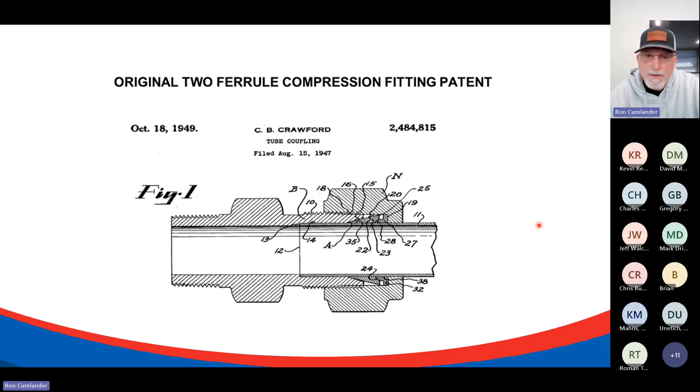And the reason I point that out is this was the first patent for the most recognized brand currently in the market of Swagelok. This lasted 17 years. And then before it expired, Swagelok tweaked especially the back ferrule flange angle to 15 degrees from a 90-degree perpendicular, and changed the angle of the nut inside to match that 15-degree angle. And they may have made some other tweaks, but those are the most obvious.

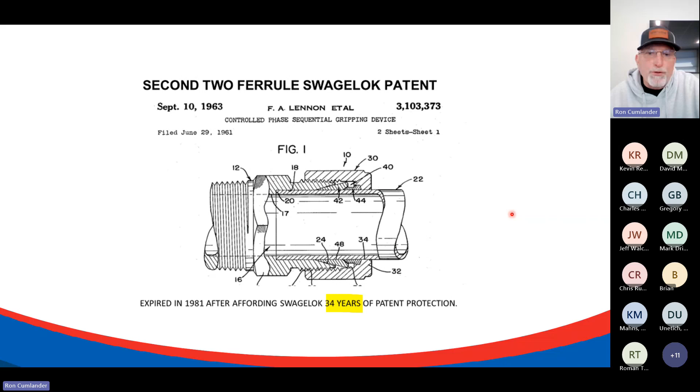And that tweak alone earned them a second patent that ran until 1981. So they had patent protection in the U.S. market for 34 years. And of course, certainly branded themselves over that period of time.

Now, the original back ferrule from them at that time incorporated a selectively hardened nose that was hardened through high temp carburization. And so that injected carbon into the nose of this stainless steel to give it the differential of hardness to grip the tube and hold it against blowout, and to deliver the required bite depth to seal against high pressure gas molecules. And so this was the cat's meow for hardening stainless steel at that particular time.

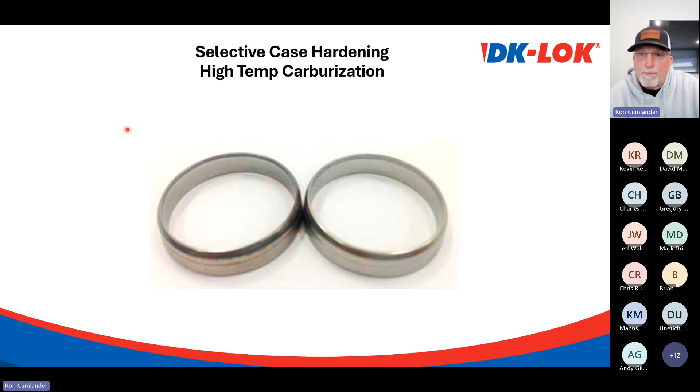Now, as we move forward through history, their 34 years of patent protection did expire in 1981, and many competitors got into the instrumentation fitting business to compete with them. And Parker at that time had brought in a two-ferrule design after the patent called A-LOK, and that is still available in the marketplace today.

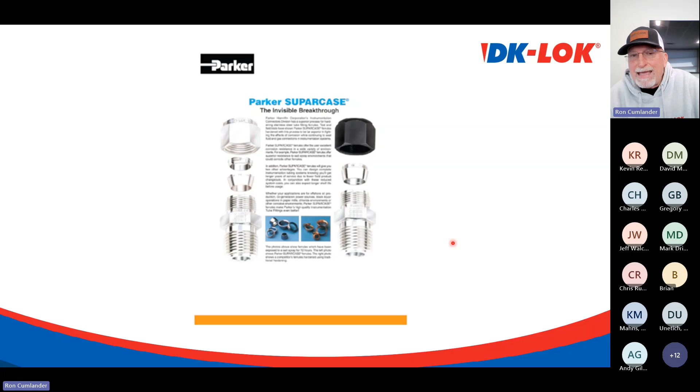But in the late 80s, Parker introduced a new hardening process for hardening the surface of stainless steel that was trademarked as Parker Suparcase. And that is still on their product today. They completely case hardened their back ferrule and their single ferrule offering. And that was technically called Kolsterizing, named after the professor Kolster out of the UK, whom Parker sponsored his work.

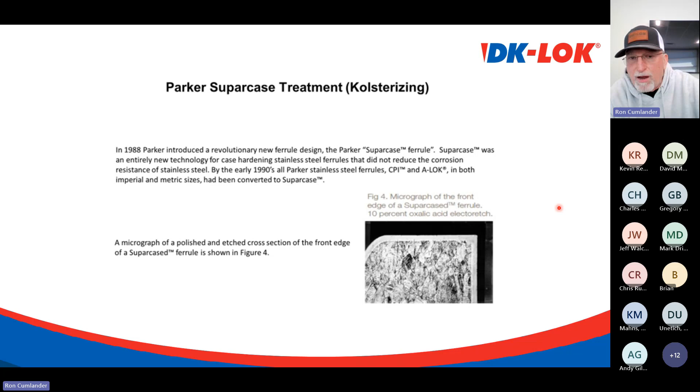So it allows you to harden the front ferrule to a controlled depth. You can choose how deep you want to harden this. But the key to the Kolsterizing process, it is a low temp carburizing process that controls that process so that no carbon forms. So it maintains the natural characteristics of corrosion resistance from the base metal.

So at that point, Swagelok realized they needed to address that. And virtually every other competitor in the market that had entered after 1981 used this same method early on after Parker introduced the new Kolsterizing method for hardening stainless steel.

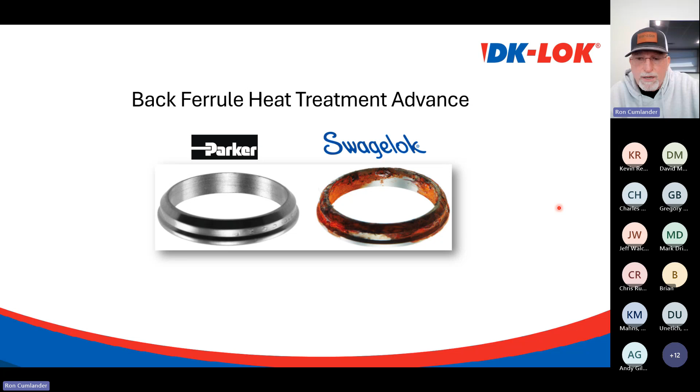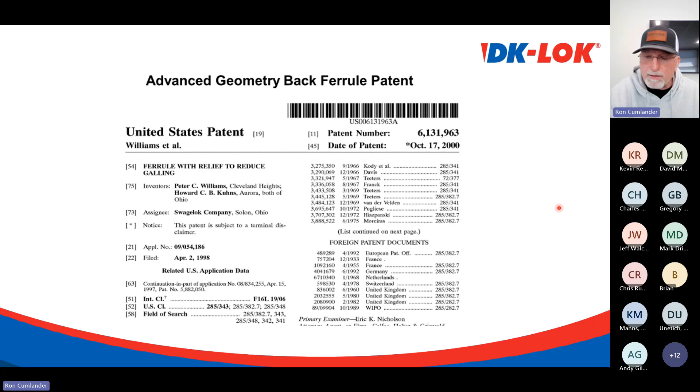So as Swagelok went down this road to address the corrosion, they were also approached by a major oil and gas firm and asked if they could make a compression fitting that would work on a new tube material developed by Sandvik called Super Duplex 2507. Very lightweight, high pressure capability, very slick, and very hard to grip. So those two things in combination resulted in the advanced geometry back ferrule patent from Swagelok that was awarded in 2000, and they introduced the product in New Orleans, Louisiana at the ISA show with this brochure right here.

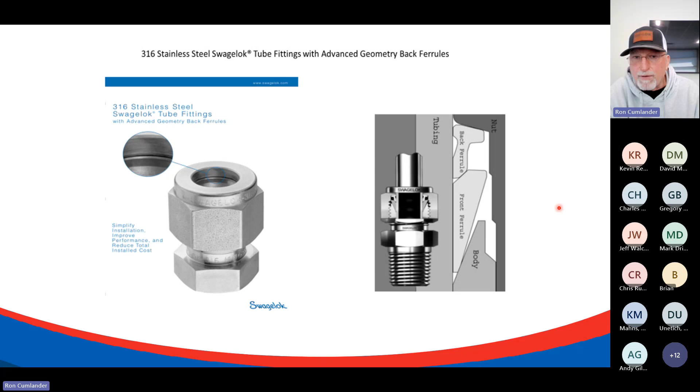And the back ferrule had a completely different shape, and they developed by this time a new hardening process to address the corrosion. So basically, what Swagelok did was they took their traditional back ferrule, which I refer to as a full mass back ferrule, and they went into the flange area on the inside and machined a groove to take some of the meat out of it. And then the outer shaft, they conically tapered it from the flange down to create a very thin cross section right here.

So basically, they took muscle and mass out of the ferrule with these two design changes before they applied their SAT-12 hardening process over the entire surface of the ferrule to give it back the strength it needed to have a differential of hardness for gripping, holding and sealing an annealed stainless steel tube, and at that time the Super Duplex tube that had been introduced by Sandvik.

Once Swagelok accomplished this, they then rolled this design over into stainless steel. When they made the first full mass ferrules in Super Duplex, the torque was so high they had to put cheater pipes on the wrenches to tighten a turn and a quarter. Changing to this design allowed them to reduce the installation torque to an acceptable level, and then they improved the hardening process. And so this has been in their product since August of 2000.

So you see a cutaway here of the current design, how it looks after 1 1/4 turn installation. And this is a cutaway or a rendering of the original full mass back ferrule after 1 1/4 turns. They look very different in shape and behavior because they are, but there is no difference in the roles and the responsibility that these two designs have for producing a leak-free connection.

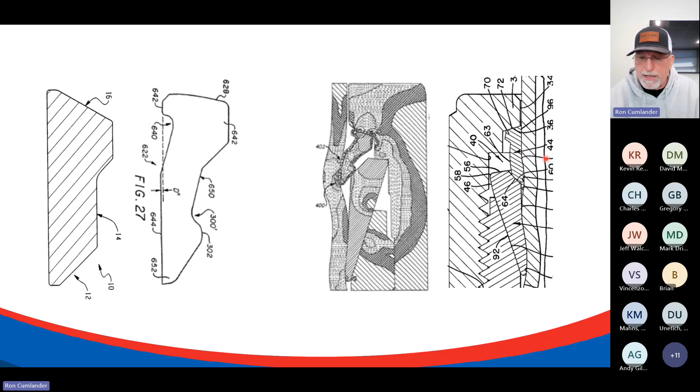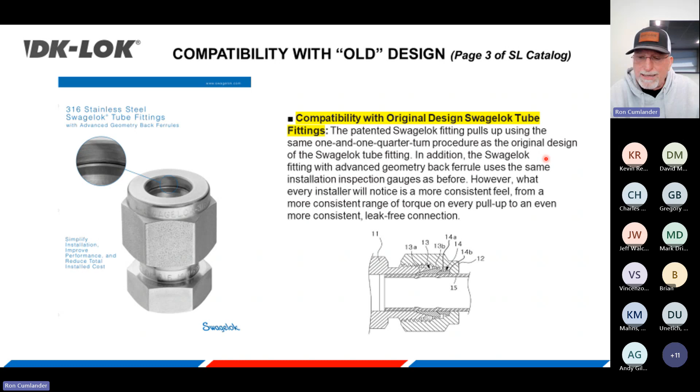So one bullet point that I would like to point out in this brochure that they introduced at that time, they stated that the new design was compatible with the original design Swagelok tube fitting. And that's important to the DK-LOK story, or the case that we're presenting to you today, because the DK-LOK fitting that we offer today is the original Swagelok design, but with a patented non-corrosive hardening

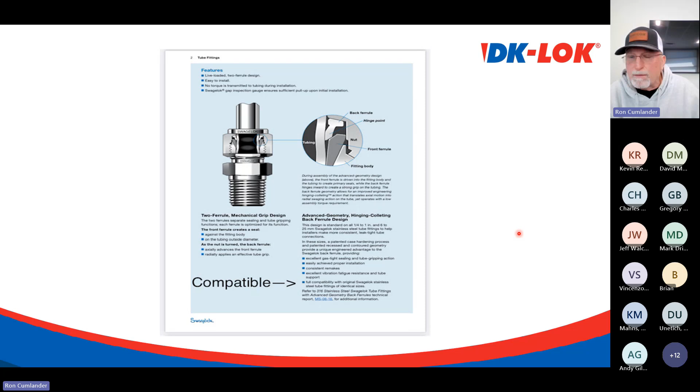process on the nose. Swagelok still makes the compatibility statement in their published literature today because they still have millions of original back ferrule connections around the world still performing. Not all fittings get replaced or taken out of service. In fact, many don't.

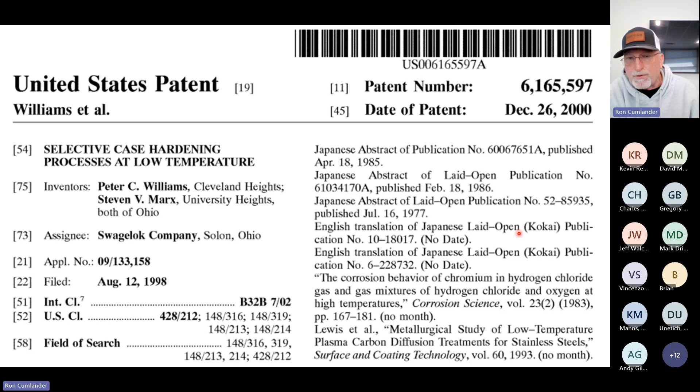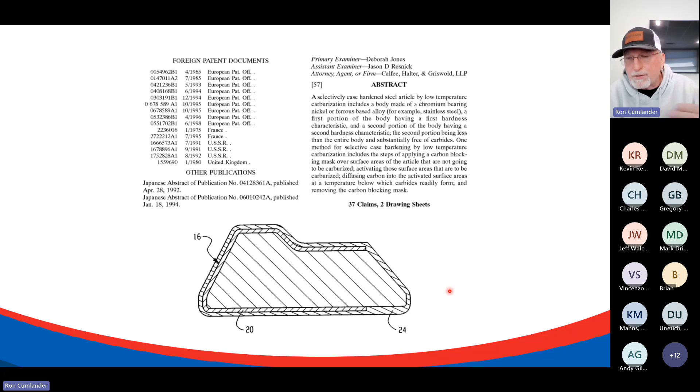So at the same time that they introduced the new geometry back ferrule, they also applied for and received this patent right here, which is a selective case hardening process at low temperature. Basically, this patent was taking their original design back ferrule and hardening the nose with their SAT-12 or similar process that would present no corrosion. To my knowledge, they never put this into their product. They used this to keep any competitor at arm's length and prevent them from putting this process into their product. And again, why this is important is because this is exactly the product that DK-LOK brings to the market today.

We have a full mass back ferrule, and this is very expensive to manufacture, but we believe it's the most robust and best technology for a compression fitting back ferrule in the market. So we mask the ferrule with copper plating, leaving only the nose unmasked so that when we apply the heat treatment, the nose gets hardened, and then we strip the copper plating off, leaving you a full mass back ferrule with only the nose hardened with a non-corrosive hardening process.

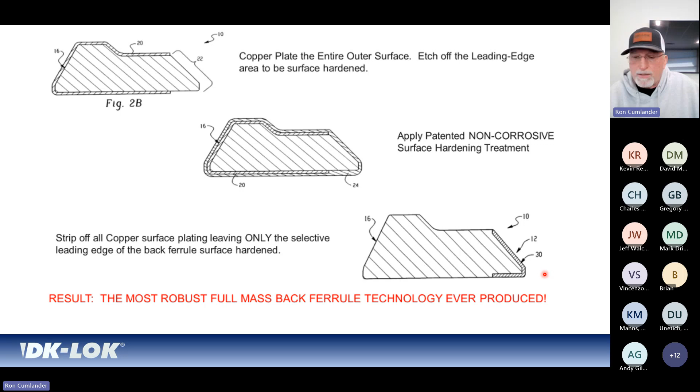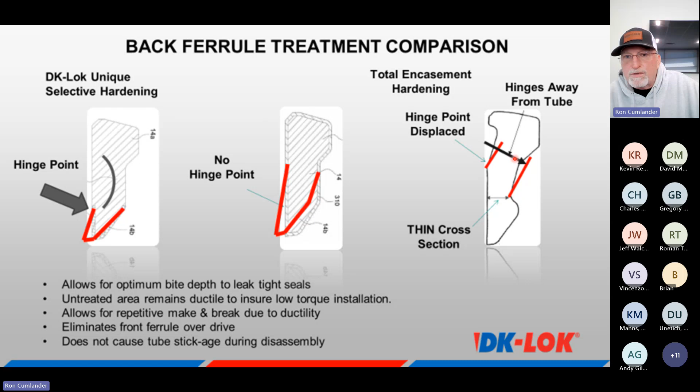This also represents the current DK-LOK offering, exact same design, but our hardening process maintains the natural corrosion characteristics of the base metal, and it does not corrode at all. In the center is your Parker A-LOK Suparcase design, which many other brands have followed, where they completely harden the entire outer surface of the full mass back ferrule. It eliminates the hinge point, which makes this ferrule much stiffer and harder. So your installation torque is going to be increased as a result of that. And then over here on the right, of course, is the current Swagelok back ferrule design.

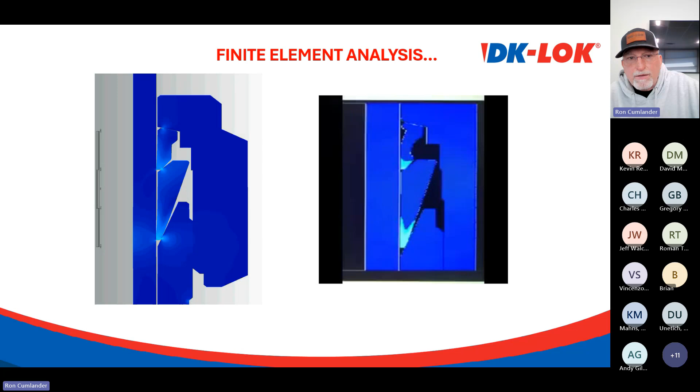So here I'll show you a finite element analysis of the two designs. Again, this would represent the original Swagelok and the current DK-LOK design. As you tighten, the nut drives the back ferrule forward into the front ferrule, which forces it down onto the OD of the tube and against the body bevel. When the front ferrule's forward movement stops due to the wedging action, the leading edge of the back ferrule dives inward to deliver the required bite depth to prevent blowout and to seal against high pressure gas molecules.

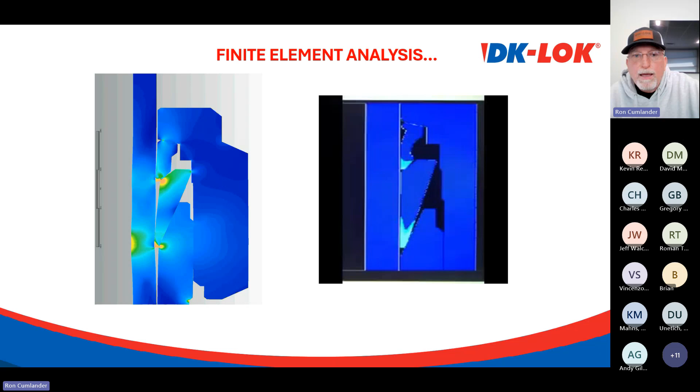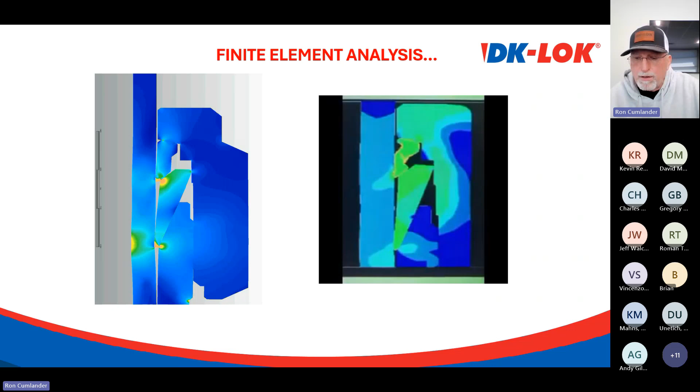Over to the right is the current Swagelok design. You'll see with their geometry back ferrule that the behavior is somewhat different, but same role. Drive the front ferrule to a sealing position, dive inward and provide bite depth into the tube OD, and lift the front ferrule into a live loaded position. So even though the shapes of these ferrules are different and their behavior is different through the 1 1/4 turns pull up, they both have the exact same responsibilities. Drive the front ferrule to seal 100% on the body bevel, dive inward to deliver the proper bite depth, and lift the front ferrule into a live loaded position.

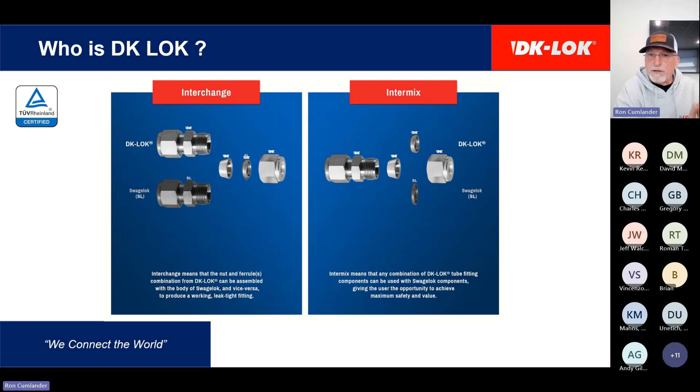So because our design is their original, the best way we knew to establish our performance and our quality and demonstrate it was to do an intermix test against a most well-recognized specification. And intermix would be dumping the components of the products into a brown paper bag, shaking it up, and whatever combination you pulled out, you put that together. Interchange is another term used where you've got an existing nut and ferrule set that's complete from one manufacturer that gets mated with the body of another manufacturer. So again, you've got interchange and intermix.

So ASTM F-1387 is a standard spec for the performance of piping and tubing mechanically attached fittings used by the U.S. Navy, GE gas turbines, probably Solar turbines, and other major OEMs.

And what it does is it has a battery of tests in it that subjects these mechanical joints, if you will, to the criteria to see how it performs. And tube fittings are a Type 4 class in ASTM F-1387. So we did a complete quality and performance intermix test with Swagelok against this particular spec.

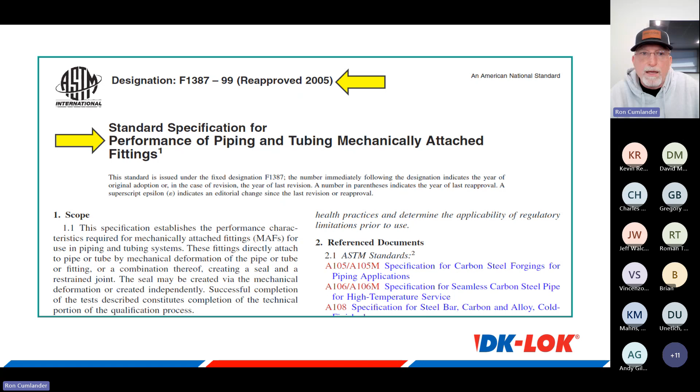And this is our sales brochure right here that you can get a digital copy of. It's basically a summary of all the testing. But we had all this testing third-party certified by a world-renowned entity, TUV Rheinland, and they witnessed all of the testing and provided these documents, which we can also provide to you, on their letterhead with their stamp and their signature, stating that at the end of all this testing, there was zero leakage throughout all the different test criteria with all the different specimens that we subjected to the testing.

And as a result of that, DK-LOK Corporation, by this two-page letter to the right bottom down here, will issue a warranty of intermix between DK-LOK and Swagelok if parts get intermixed, as though it's a pure DK-LOK assembly. We don't promote intermix out of practice, but when a customer transitions, the possibility for parts to become intermixed does exist. And so we do warrant that in the event that a Swagelok component gets mixed with a DK-LOK component, or you have interchange where a Swagelok nut and ferrule system is on the end of a tube that gets mated with a DK-LOK body. Again, we treat that through our warranty as though it's a pure DK-LOK assembly.

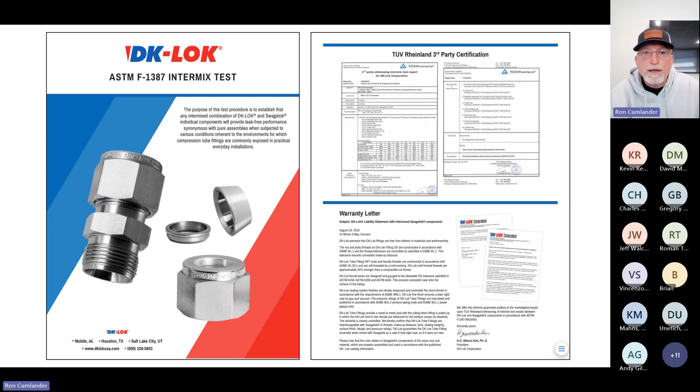So just going inside the brochure quickly, here's a summary of all the tube wall thicknesses and sizes, their working pressures. When you take the 4 components of Swagelok times the 4 components of DK for intermix, it gives you 16 combinations. But one of those combinations is pure Swagelok, one is pure DK, so we drop those out, leaving 14 combinations of intermixed components that we numbered by specimen number so we could track those specimens' performance through the actual testing.

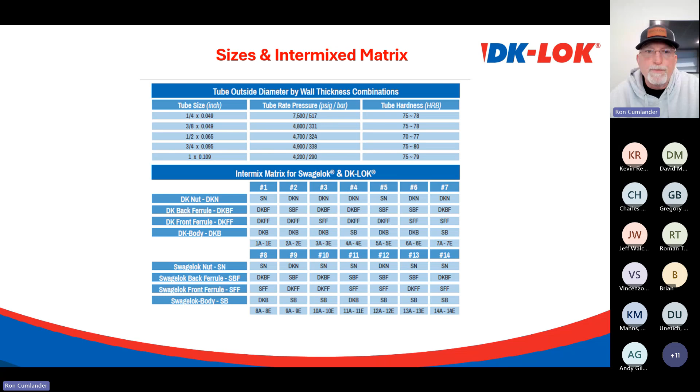Here are the number of tests that we subjected these intermixed specimens to: a pneumatic proof, a hydrostat, impulse, flex fatigue, tensile, rotary flex, repeat assembly, which is make and break. And again, we didn't do the mercurous, but we did thermal cycling and some other. And again, you can set up a time with Peerless to walk through a much longer detailed presentation than this to get more information on this. But the pneumatic proof, for example, was the first test that we did.

So we built all the spools and we followed the procedure for the pneumatic proof test. And once we completed it, there was no leakage. We could have stopped, but we chose not to. And in the pneumatic proof, ASTM F-1387 gives us the option of testing at 500 PSI or 125% of the working pressure of the tube. So we chose the more severe pressure rating of 125% of the working pressure of the tube.

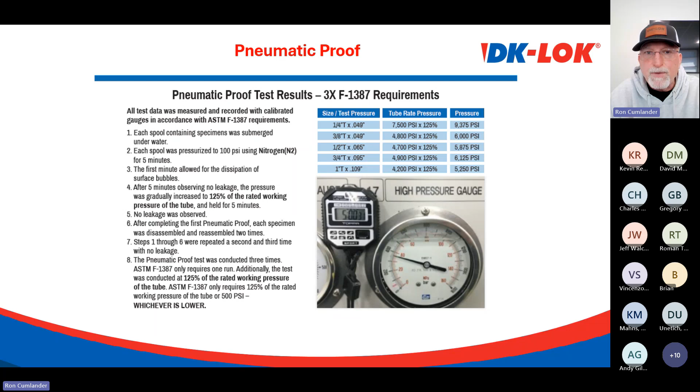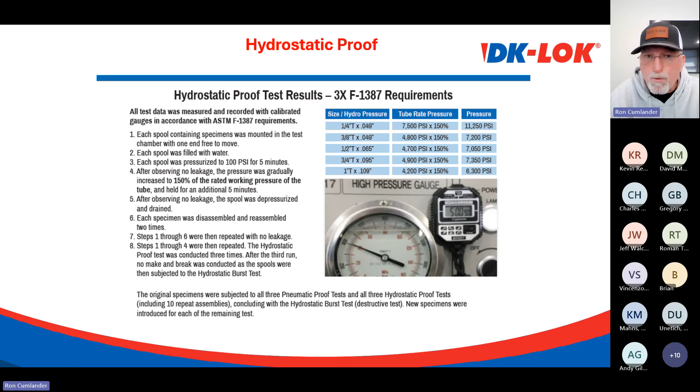And when we completed this with no leakage, we decided to go further. We shut down, depressurized. We did 2 make and breaks on every specimen, and we did a second run. No leakage. We shut down, 2 more make and breaks, did a third run. So we actually tripled the requirements of this particular test in comparison to the requirements of F-1387. Then we rolled right over into the hydrostatic proof test. We did the same thing here. We used the exact same specimens from the pneumatic proof, but we tripled the requirements here before we rolled over into the hydrostatic burst. And then, of course, we took the tubes to burst, and then we moved on from there.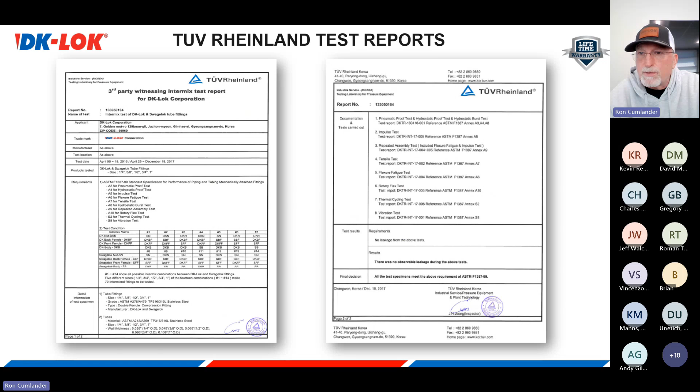So as a result of this, as I mentioned earlier, the president of DK-LOK Corporation, based on zero leakage throughout all this testing, issues this guarantee of warranty of an intermixed combination of our components with the Swagelok. And here's the TUV Rheinland documents. We can provide you copies of any of this if you'd like to have it to support us and give you the details of the testing. And here's our intermix warranty. We can also provide you a copy of the lifetime warranty.

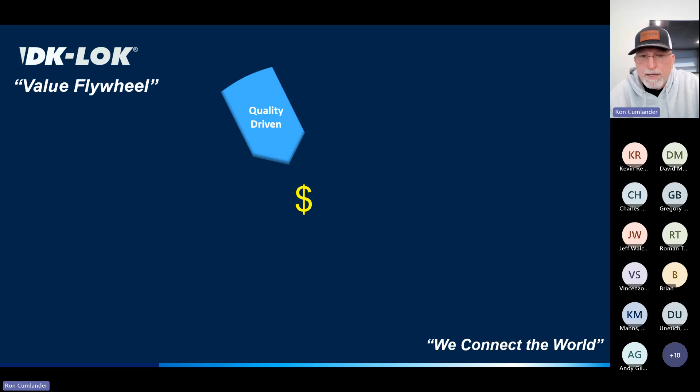And again, our mantra is quality without compromise. That's what we pursue. And we do all of this at a lower total cost of ownership. So we believe that partnered with Peerless, with our product offering and the quality, that we are best in class for instrumentation, fittings, and valves.